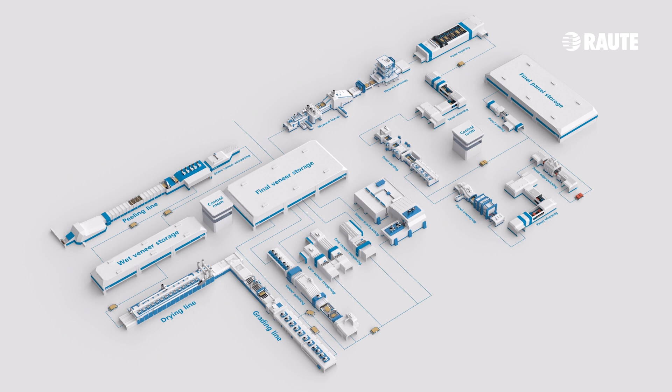When we collect data, we enable real-time monitoring. No data, not much to monitor. This allows us to track production processes, optimize resource allocations, and adjust them as needed. In addition to machinery-related data, which helps us to fine-tune our preventive maintenance schedules, we have analyzers throughout the mill, from XY chargers to panel repair lines and everything in between.

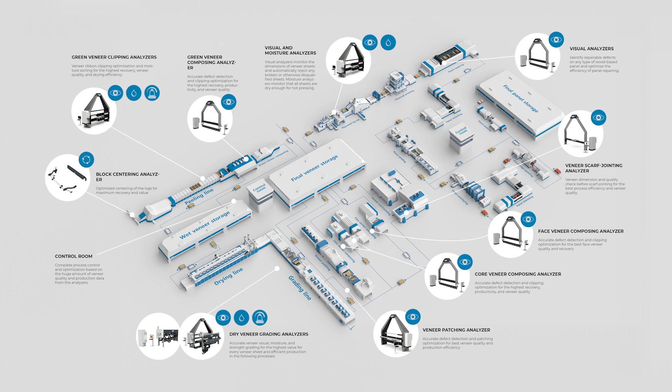These analyzers collect data from incoming material, raw material if you will, and make instantaneous decisions based on measured characteristics and set grading rules, thus making sure that every piece of veneer ribbon, every veneer, and every panel ends up in the right location for the next step of the process. The importance of accurate data is obvious when we are making decisions that control the material flow within the mill. With accurate data, data-driven decisions to minimize waste, reduce energy consumption, and promote sustainable practices are made easier.

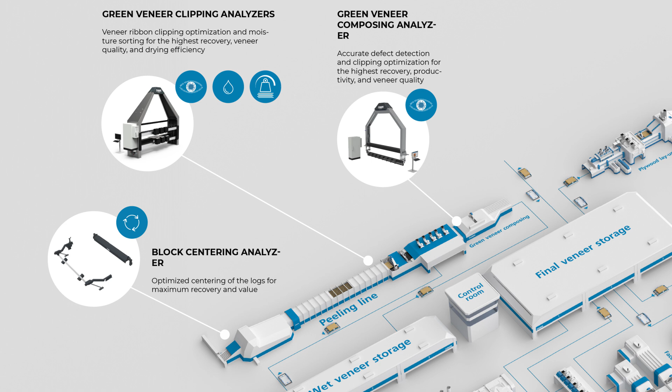This is where Raute's AI-enhanced R7 series analyzers will give you increased accuracy and precision compared to traditional non-AI analyzers. For example, in peeling lines, veins and rounding errors are detected as a whole instead of multiple small chunks. Our microwave and X-ray sensors will give you accurate moisture and density measurements there as well. In grading lines, precision of knot detection, resin pockets and harvester marks are significantly improved. All this, integrated with our moisture and strength analyzer, paints a comprehensive picture of your dry veneer stock.

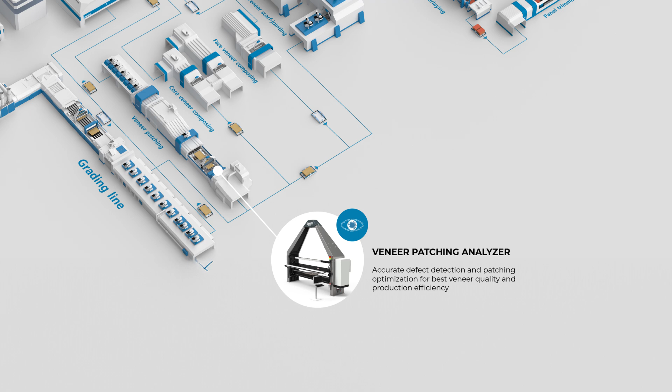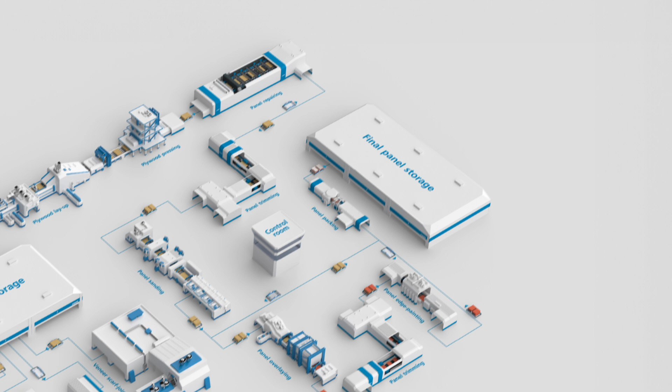In composing lines equipped with our AI systems, this increased accuracy allows us to minimize operator involvement, maybe even remove the operator altogether. So no more ripping of pieces of veneer or marking defects with a pen or paint. Patching lines, well, that's where every millimeter or tenth of an inch matters. So again, the increased precision of AI systems on defect size detection will give you the opportunity to make grading decisions with confidence. In panel repair lines, we can utilize AI to filter out glue stains present after layup and pressing. No more excess repairing.

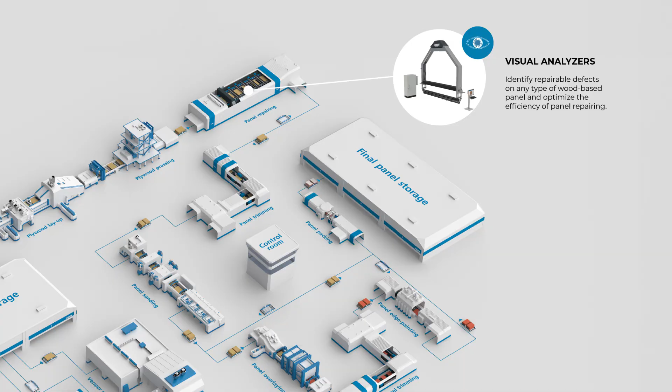In conclusion, collecting correct data and making sure that the data is accurate is the first step for us to optimize processes, improve quality, find causal relationships, and reduce our environmental impact. Thank you for your attention. Now, Antti will take over and tell you more about the next step, utilization of long-term data in practice.

Thank you, Janne. So, how to put the data to work? Automated processes generate a lot of data. A veneer dryer can process 1 million sheets per month. From each sheet, you can track dozens of measurement points. Recently, the usage of grading data has been increasingly gaining popularity at mills. Grading data is one of the 3 data packages we have in Raute Millsites data collection and reporting system. Best mills have had the basics in place for some time when it comes to utilizing data. The most advanced are also having dedicated people working with the data. Now it's time to put the focus on grading.

For the most part, visual grading takes place right after the drying. Following closely the grade distribution trend is very important for maximizing the share of the most valuable veneer. Any changes in the distribution have an immediate effect on profitability and resource efficiency. In this simplified example, let's look at a grade distribution trend. We can see the share of composer grade increasing. To understand better the reasons behind, we can use the critical defect statistics available in Millsites. For each sheet, there is data available for what was the main reason causing the sheet to be graded in the lower quality instead of the more desired higher quality.

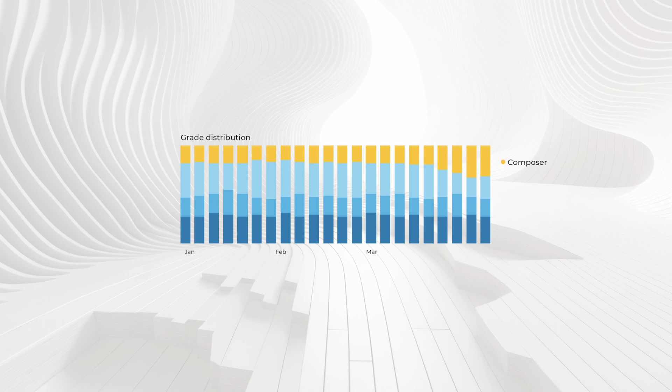So, we are interested in why the composer share is increasing. By filtering the critical reasons for this grade, we can see the issue is with too long splits. Then we can start checking the process backwards. Were there any abnormalities in the drying conditions that caused, for example, overdrying and splits? Similarly, there are obvious things to check from peeling and log conditioning data, which can correlate with splits. You might find a small change there, and by fixing it, you get the grade distribution back to normal.

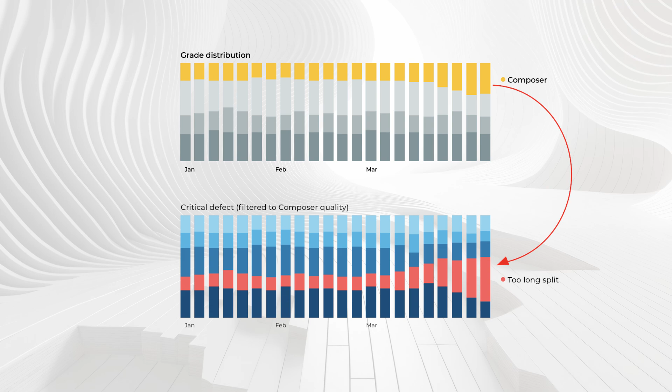Then, what if the root cause is not in your hands at the mill? Let's say a change in raw material. You must now work with what you get. Here, a rear-view mirror to previous processes doesn't help much, but you can still have a look at the following stages. So you have sheets with a little bit longer splits. What happens if those were not sent to composing? Could the sheet hold together all the way to the layup station? How much bigger share of full sheets would you get in that case?

The visual quality grades themselves are fixed. You cannot make compromises on those. But how is the limit being defined for a split that sends a sheet to composing? Is this based on the fact that the sheets are breaking down in the layup infeed? If not, you might be able to increase the safety margins on split length and still get it in one piece to the finished product without compromising on quality. This is a very difficult and risky trial to do in real production. It also takes a lot of calendar time to verify the results.

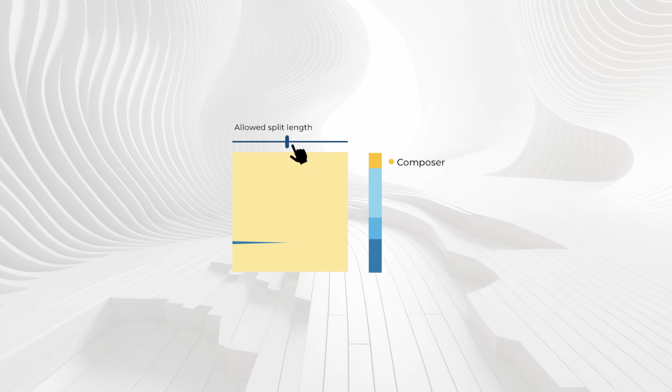That's why the grading data package in Millsites comes with a scenarios tool. With that, you can do test runs offline. This means you use your actual sheet data and you see how your grading distribution would have been if you'd allow a little bit longer splits. You can run different scenarios with any defect type and see what the outcome is before you do any changes in real grading parameters at the production line. All this happens in a fraction of the time compared to what it would take in real production to do the test.

In real life, it might not be as simple as this example, but I think you got the point. Long-term grade distribution trend and scenario runs can make a big difference. It is a significant enhancement on resource efficiency overall. This is how the fastest developing players run their mills, and the results speak for themselves.